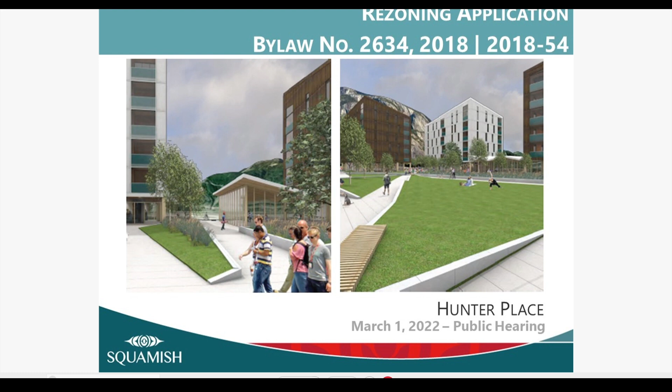The subject lands are designated mixed employment in the official community plan. The application, if approved, would be subject to Development Permit Area 2, Development Permit Area 3, and Development Permit Area 6.

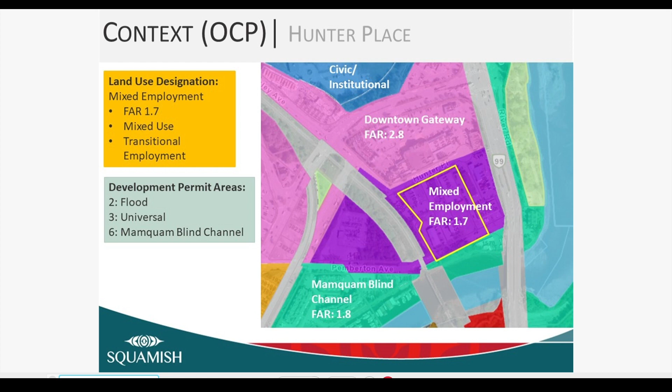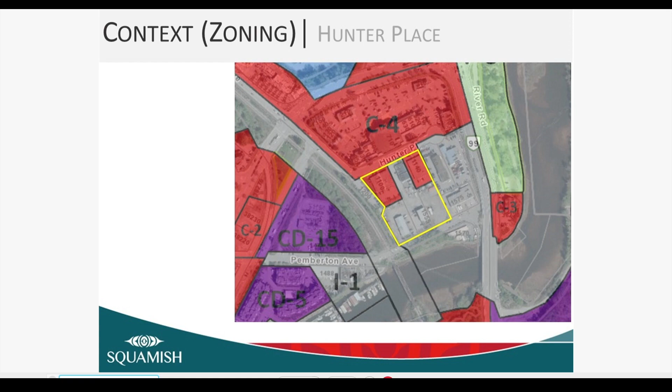The subject site is split zoned. 1100 and 1140 Hunter Place are partially zoned C4, that's downtown commercial, while the remainder of the site is zoned I1 light industrial. The applicant is proposing to rezone the subject site to a mixed-use comprehensive development zone.

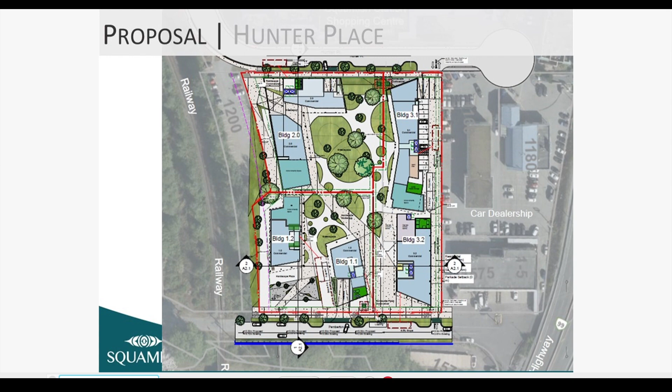The site plan includes 5 distinct buildings connected by a common courtyard at grade. Public access to the courtyard will be secured by statutory right-of-way as detailed in the bylaw requirements. The developer proposes to partially sink the parkade below grade to create a continuous pedestrian area extending from the public realm throughout the site.

These are some renderings of the proposed development. Form and character will be reviewed at development permit.

Employment space in the updated proposal has increased to 30% of the gross floor area. If the employment space is realized and fully tenanted, it would create approximately 208 jobs in the development, compared to a residential population of 410.

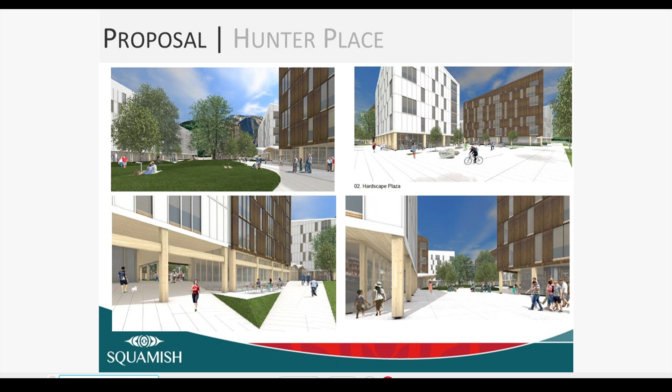The rezoning seeks to change the zoning on the I1 zone parcels, while the use and density on the C4 parcels would remain largely unchanged in the proposed comprehensive development zone. The proposed height is 30 meters and 6 stories, with the office building permitted to go to 7 stories. Parking is anticipated to meet the bylaw.

This application triggers the community amenity contribution policy. The applicant has proposed that CACs be calculated on the increase in density on the I1 zoned land only, which is consistent with the CAC policy.

The applicant has increased their affordable housing contribution to 17.5% of the new gross floor area to be affordable units, instead of the 10% that is typically required.

This slide outlines some of the items that will be secured in the land development agreement, including acoustic requirements and other rail requirements as detailed by CN Rail, electrification of all residential and office units, including the hot water tanks, while the office building will be constructed of mass timber. The number of childcare spaces, including the higher requirement of space per child.

Design drawings of active transportation accommodation north of the site to Buckley Avenue, Cleveland Avenue intersection. Language that holds the developer responsible for raising infrastructure along Pemberton Avenue. Language that secures the full build out of frontage along Hunter Place and Pemberton Avenue.

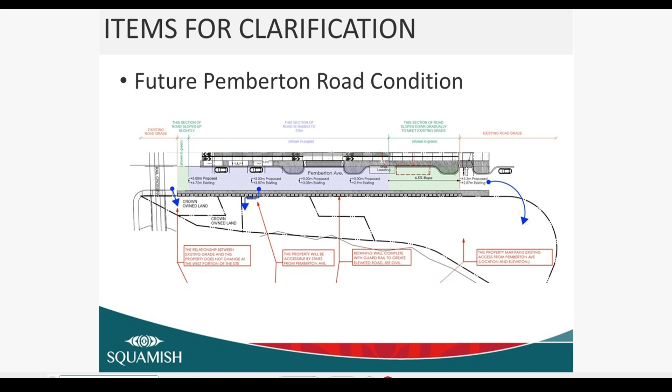Next slide, please. So we also want to provide more clarity on the proposed road between the railway tracks and the development.

In 2020, the property owner to the east of the development approached staff with concerns about vehicle access to Pemberton via the rail crossing once the bridge over the Mamquam Blind Channel is built. They hired a consultant to review their concerns and provide recommendations on how to mitigate them. The recommendation was to replace the rail crossing with a road along the east side of the rail line, connecting Hunter Place to Pemberton Avenue.

The key concerns were that the grades were not meeting the requirements for trucks, and the intersection with the bridge coming in would not have adequate distance from the railway tracks. Their consultant prepared a cost estimate as well, suggesting that closing the crossing and building the proposed road would be the less expensive option due to the upgrades required at the rail crossing.

This cost estimate was based on some key assumptions that I'll speak to in a moment. They also pointed out that closing the rail crossing would give the opportunity to remove whistling from this location. We took these concerns very seriously and appreciate the input, because ultimately we rely on input from the general public to help inform our decisions. As a result, we put this rezoning on hold until we knew if these concerns would impact the design.

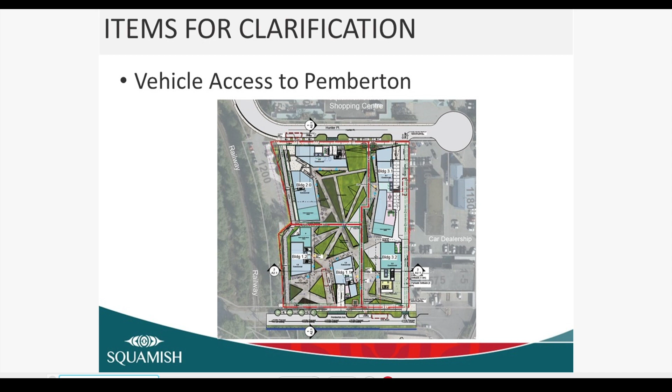Ultimately, staff has to look at this under the context of rezoning. For example, if we found that an intersection at the north end of the planned bridge was not feasible, meaning we would have to close the rail crossing and an alternative access to Pemberton was required, this would have big impacts on this proposed rezoning. We would have to secure some way to get that road in. You can flip it around the other way, and the question is whether this rezoning actually triggers the need to close that crossing. So we need to look at it from both angles.

So what did we do? First, we hired a consultant to complete a traffic impact assessment specifically for an intersection at the north end of the bridge. This assessment looked at the feasibility of different scenarios, for example, with or without turning lanes, signalization or not. We confirmed that an intersection can function adequately and safely here, meaning vehicles can turn into and out of Pemberton East without unacceptable delays and without unacceptable vehicle queuing.

Second, we had our consultant complete a conceptual design, because the first step showed us it is technically feasible by the numbers. Next, we had our consultant complete a conceptual design to confirm it would actually fit at this location. This did confirm we can fit an intersection here, including meeting the grade requirements to accommodate trucks and to provide adequate distance from the rail crossing. Finally, we looked at the impacts of the proposed rezoning on the overall traffic network and confirmed that this development does not drive the need to close the rail crossing.

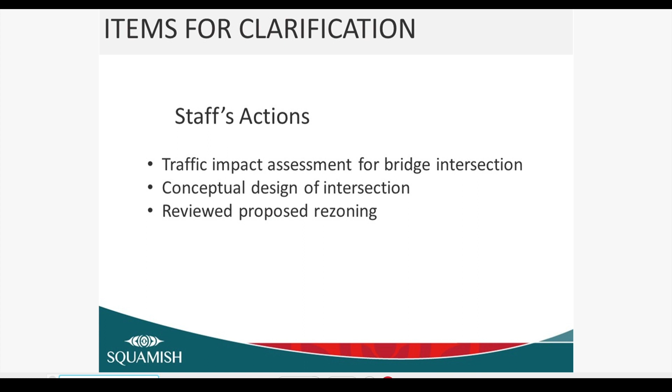So staff's conclusion is that the proposed alternative access is not required either right now, nor as a result of this development, or due to construction of the bridge. Going back to those key concerns, we can meet the required grades and setbacks from the railway tracks. The cost estimate completed by the neighbor's consultant does not take into account the land we would need to purchase for the road, and assumes the district would be paying for all the railway crossing upgrades.

Our opinion is that since the developer will be paying for the rail crossing upgrades, it will actually be less expensive to keep the rail crossing open than it would be to close it. We will also always be keeping a pedestrian crossing open here, which means there is no guarantee that CN will agree to stop whistling at this location.

Additionally, the proposed alternative road only provides a 15-meter right-of-way, which does not meet district standards. The minimum road right-of-way width we would require here is likely 20 meters. The proposed road is not being proposed as part of the rezoning in question today, and once again we are required to review this in the context of this development, which is what we have done.

Once the bridge is built, the most direct route to Pemberton for fire trucks and ambulances will be over the bridge and across the railway tracks. So even if we close the crossing to general traffic, we'll want to keep this open as an open access for emergency services.

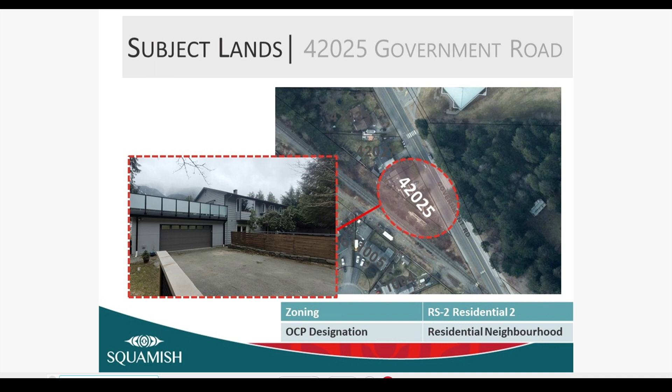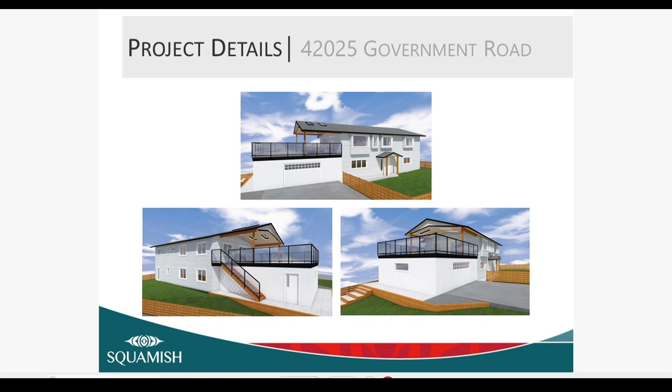The application seeks to permit the extension of the roof to cover a portion of the existing deck over the garage.

The application is seeking a variance to section 8.6 of the zoning bylaw. The proponent is requesting a reduction in the rear yard setback from 7.62 meters to 1.47 meters.

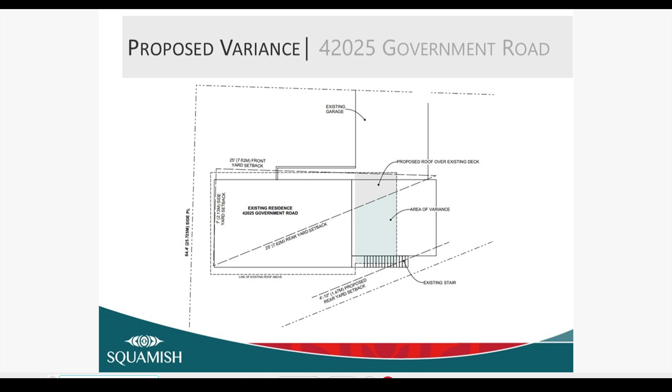The subject property is a uniquely shaped triangle lot fronting Government Road. The location of the existing single unit dwelling does not meet the required rear yard setback.

Staff are supportive of the variance request as it would allow for the construction of a covered outdoor space, which would allow the space to be enjoyed in all weather conditions. Given the unique shape of the lot, a variance would be required for any addition to the property.

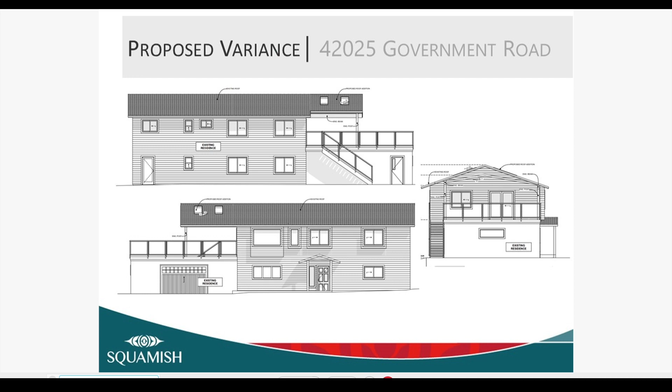DVP 11 was posted to the district's development showcase and a development sign was installed on the property. No request for a public information meeting was received and no public information meeting was held.

Variance notices have been sent out to residents within 100 meters of the property as per legislative requirements. One comment was received for this project.

Staff recommend that the District of Squamish authorize the issuance of development variance permit number 11 as presented for the property located at 42025 Government Road, Squamish, British Columbia, and that the mayor and corporate officer be authorized to execute DVP 11.

Alternatively, council could not authorize the development variance permit or refer the development back to staff.

Thank you. At this time, I welcome any questions.

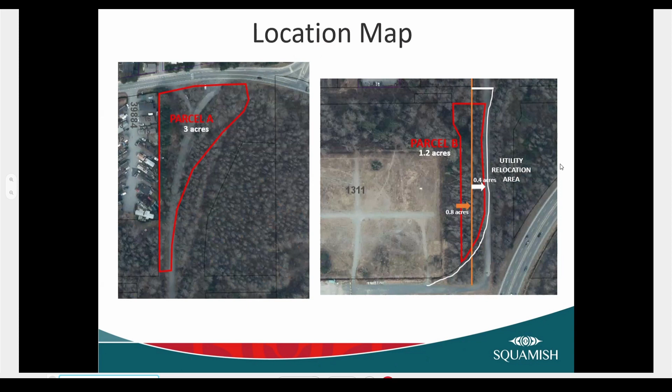These areas were reviewed as part of the Pioneer Way Extension capital project, and engineering recognized they would not be needed as future road, so it was an opportunity to close these at this time. Parcel A has a district sanitary line and Fortis gas main being relocated in a later phase of the Pioneer Way project - sorry, this was missed in the report to council, so apologies for that. In the meantime, we will be working with Fortis for a right-of-way in this parcel. Parcel B has a district sanitary line and a Fortis gas main being relocated this year as part of phase 1 of the project.

In terms of next steps, we will work with Fortis for a right-of-way for parcel A, and then seek MOTI approval, which is needed when you're within 800 meters of a highway. Then we will advertise statutory notices and come back for adoption of the bylaw, after which we will execute the right-of-way agreement and register all the plans. As such, we're seeking first three readings of the road closure bylaw and permission to advertise the statutory notices prior to adoption. With that, we turn it over to Mayor and Council for any questions.

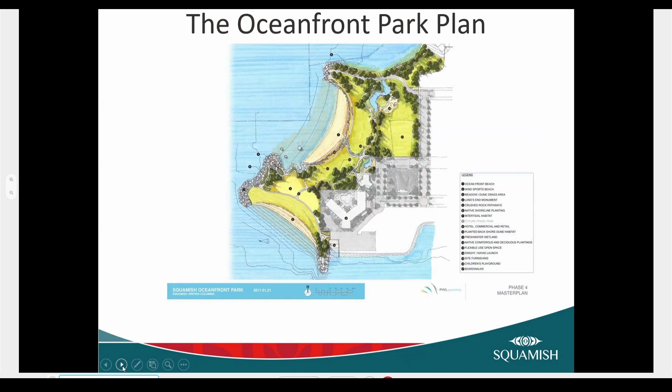So that was the level of detail that we had when we executed the PDA, and now the consent agreement tries to close the gap between that and getting the park built.

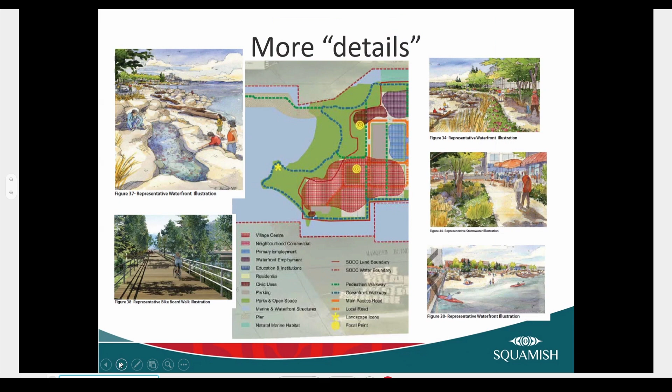In terms of the details, the phase development agreement had a number of supporting documents and spreadsheets, but in some cases we're left interpreting the drawings contained in the sub-area plan. So it's been a little tricky, but what we've done is try to get this agreement based on some direction contained in the phase development agreement.

The PDA says the developer has to do a certain number of things: design and construct the park, the beach, dune grass area, pathways, a boardwalk, intertidal habitat, lands end monument. These are the sorts of things that have to get done prior to building occupancy.

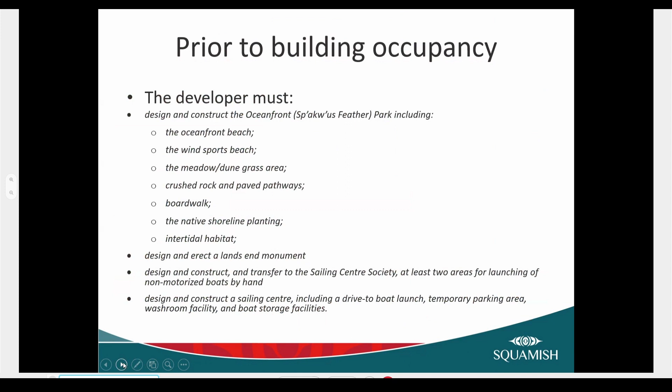So what we're trying to understand is, okay, well, how does that get done? The consent and acknowledgement agreement provides the details. The PDA went as far as it could at the time in 2015, but some details couldn't be resolved without what would have been very painfully slow negotiations at that point - we would still be negotiating. So this agreement attempts to resolve those details.

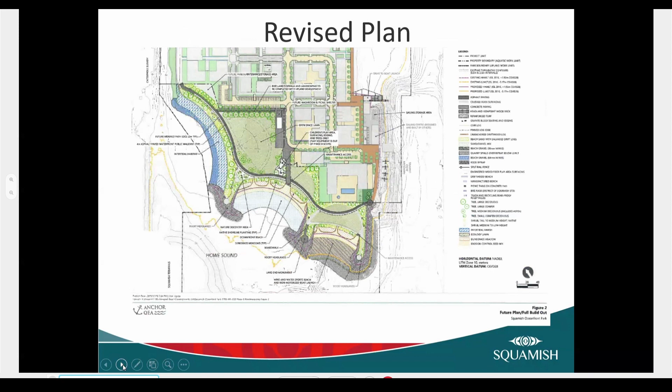It's really part land development agreement and part servicing agreement, so it occupies an odd place as an agreement. We've been increasing the levels of detail as we go through - getting closer and closer to having specifications for landscaping, for furniture, how wide the pathways are, what they're made of, how much grass goes where, what trees are there. So we're getting close, and some of the details in the plan are as follows.

Section 1A addresses the requirements to construct the park and lands end monument - it's restating largely what's in the PDA. Section 1A3 details a temporary ramp that we constructed while the sailing center is still being designed, allowing the sailing center to be provided later. That work's running a little further behind the park, but it's still active.

Section 1A3 also details that a public washroom is to be provided at the completion of the park, either at the park or at the sailing center, or another option. At this point, we're looking at being in the park and having a permanent washroom available at opening of the park or prior to occupancy of the buildings.

Section 1B provides significant details regarding what's known as the intertidal habitat or the habitat enhancement features, which are subject to a number of Department of Fisheries and Oceans approvals.

The majority of the park care and maintenance will be assumed by the district after 1 year, and that's very typical for park developments. When a developer builds a new park, after a year, it's warranted, and we assume maintenance. The habitat enhancement features are a little different, however. We don't typically deal with these sorts of things, and the DFO approvals require that they're established after 5 years. So the habitat enhancement features are going to be maintained by the developer for 5 years, much longer than the park itself, where we'll assume maintenance.

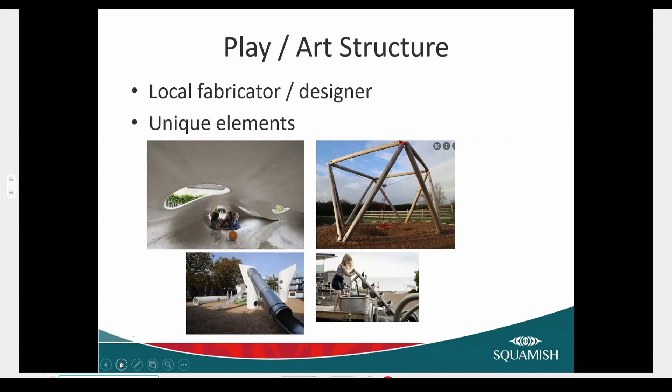So at that point, I can entertain council's questions on the agreement.

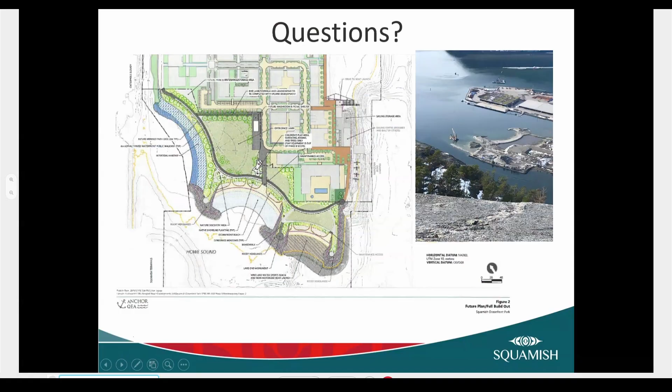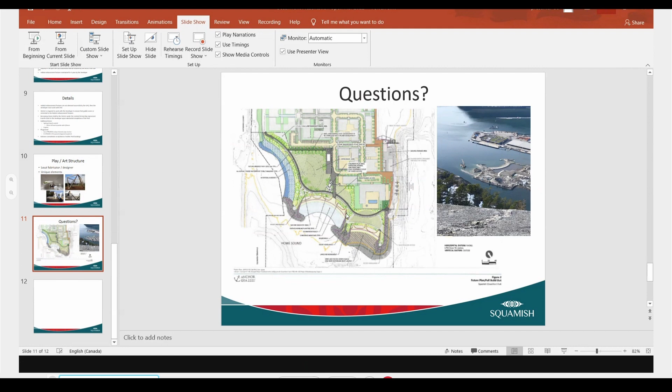Just one point of clarification with regards to the booking of the park by the developer. I just want to confirm if that booking is still subject to regular fees and charges, and if we have considered capping the number of days or weekends that the developer would have quote unquote priority access.

Through the chair, in order, yes, it would be subject to if we have fees for park bookings, and no, we haven't discussed a cap on those.